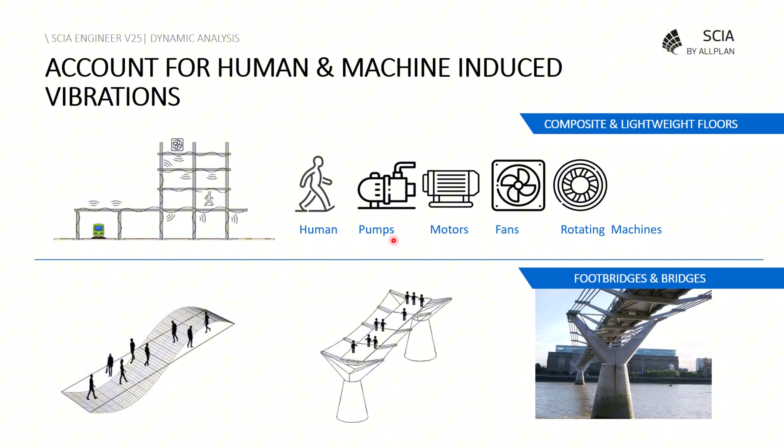As you know, buildings or civil structures like bridges, and in general every kind of structure, can be affected by vibration that can be induced by several sources. First of all, human activity in buildings or passage of pedestrians on bridges, but also machines like pumps, motors, fans, and rotating machines. This vibration can have an effect of discomfort in buildings, but can also have a structural impact when they pass a defined threshold. These phenomena are particularly important in buildings with composite and lightweight floors, and are particularly relevant for footbridges also.

In order to account for these phenomena, to study them and prevent their bad effects, we introduced in SCIA Engineer version 25 new harmonic analysis capabilities. The new analysis allows the user to perform single frequency and frequency range harmonic loading analysis. It means that the user can perform the analysis for a given frequency, but also specify a frequency range by minimum, maximum frequency and frequency step. So the analysis will be performed at once with one click for all these frequencies, and the result will be encompassed in an automatic class that will be generated.

Also, there is the possibility to consider in-phase and out-of-phase loads in order to account for the most complex harmonic phenomena. There is the possibility to apply harmonic loads in the form of nodal loads, line loads, and surface loads. And there is the possibility to use constant and Rayleigh damping.

Also, there is this new feature that allows automatically applying the sign of the harmonic loads based on a modal displacement, so based on the eigenshape. This feature can be particularly interesting for situations in which the user wants to place himself in the worst case scenario, that is, the one in which the harmonic load is orientated following the eigenshape that is closely spaced with respect to the resonance frequency of the structure. This kind of situation is specified in many guidelines for design of footbridges or buildings.

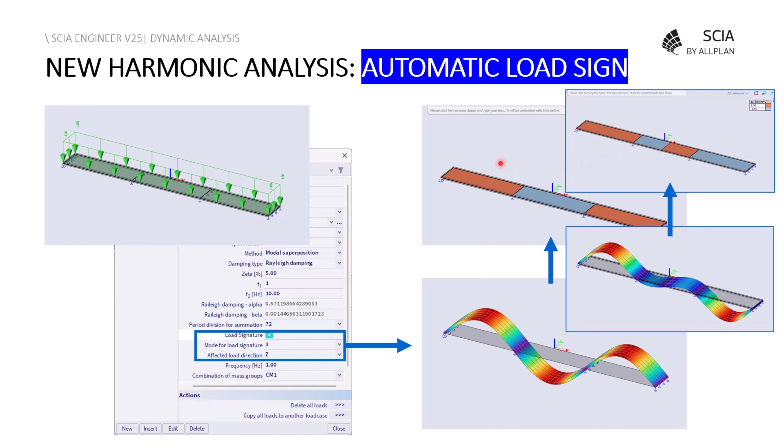Again, if I had used another eigenmode like this one, the application of the load would have followed the direction of the eigenshape. So the worst case scenario is automatically taken into account with just a click, without the need for the user to specify different zones of loads with positive and negative sign.

Many of you probably know that harmonic analysis was a feature already present in the old 32-bit versions of SCIA Engineer, but you probably noticed that the new solution offers many more possibilities with respect to the old one, so it's really a big step forward in the dynamic analysis for SCIA Engineer.

Next to harmonic analysis, another feature concerning the analysis introduced in version 25 is the possibility to perform stability analysis on stages. This is an extension of construction stages analysis that allows the user to select one or more construction stages and specify that in these selected stages the user wants to compute stability, so to perform a buckling analysis. Why? Because there can be the need during a construction sequence to show that the structure is stable not only in the final stage when it's finished, but during the whole construction process. This new feature allows exactly that, in a very simple way, just selecting a checkbox, everything will be automatically computed.

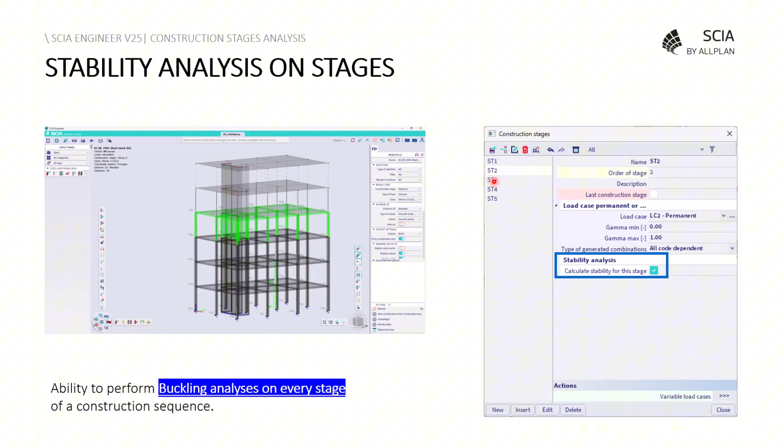Finally, what concerns the developments for the analysis part, a new convergency graph for nonlinear analysis has been introduced in SCIA Engineer version 25. As you know, we had this convergency graph in past versions of SCIA Engineer. We introduced a new one that not only gives the information for every selected nonlinear analysis, but also has many more features.

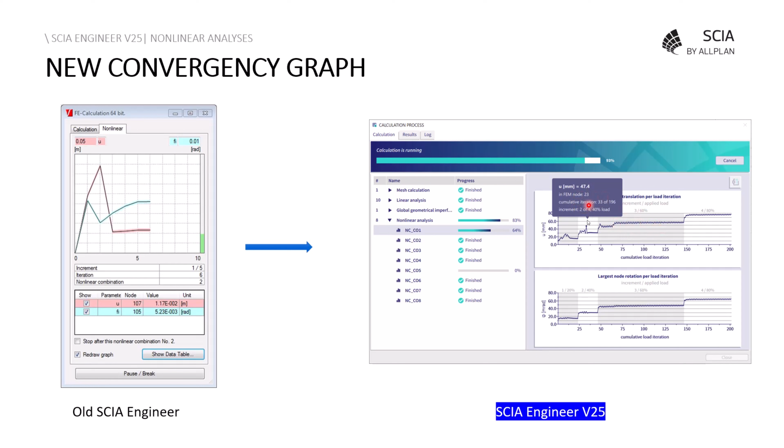But there are also other interesting features, like the possibility to export this graph in Excel, or the possibility to select each one of the points of this graph and have the local information. So with this feature we complete the part relative to the analysis, and let's move now to see the new features and improvements introduced in the field of results.

The first of these new features is the introduction of the new dynamic detailed results menu. This new results menu serves primarily to extract values relative to accelerations, velocities, and displacements of the structures. It's a feature that can be used for all kinds of dynamic analysis in SCIA Engineer, so either seismic response spectrum analysis or harmonic analysis.

There is the possibility to visualize this information on the screen, to export it in PDF, or also to have it in Excel format. But there are also other possibilities offered by this feature. First of all, the possibility to select which kind of results one wants to extract, whether peak results, so the maximum value, or root mean squared results. As you know, the root mean squared results can be very useful to judge about comfort of slabs, for instance, as the values in which the thresholds are expressed in most of the guidelines.

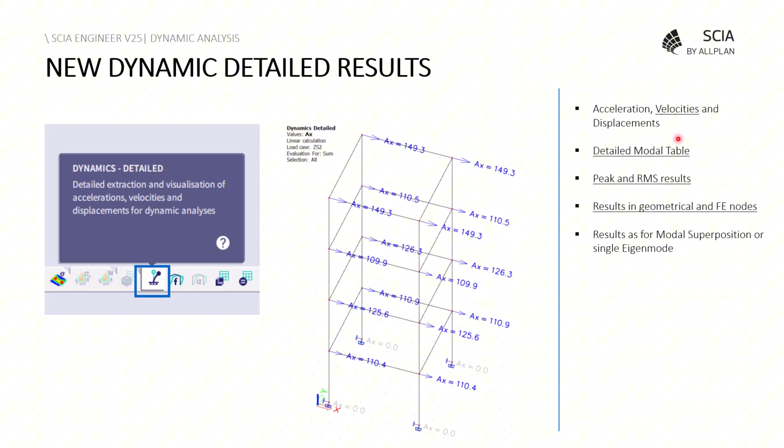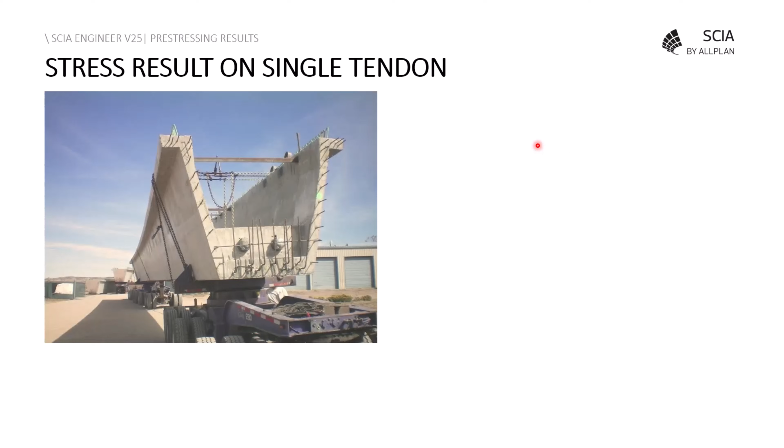Next to this, there is the introduction in SCIA Engineer version 25 of the possibility to visualize stress results on single tendons. As you know, it can be very useful for people doing pre-stressing analysis to be able to check for each single tendon the state of stress. In SCIA Engineer version 25 we introduced this possibility that was missing before.

And finally, in what concerns the results, there is this nice improvement introduced in the engineering report, that is the possibility to edit multiple live pictures at once.

In the specific, now it is possible, differently from before, to change the viewpoint of multiple pictures at once. So the user just needs to select in the engineering report all the pictures for which you want to change the viewpoint, and with a single action the viewpoint will be changed for all the pictures.

Similarly, there is also the possibility to change the view parameters for multiple pictures, by selecting multiple pictures at once and changing the view parameter. This is also a very powerful feature.

So for what concerns results, I stop here. Let's move to the new features relative to loading. In what concerns loading, in SCIA Engineer version 25 there are several novelties regarding the 3D wind load engine. First of all, there is the possibility to apply the wind load on canopies through the force coefficient approach.

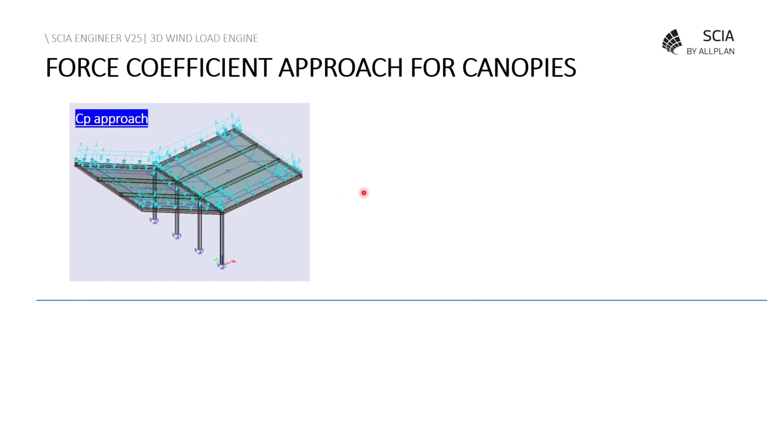As you know, till now it was possible to apply wind force on canopy roofs only through the pressure coefficient approach. But the Eurocode is clear that wind force on canopies can be applied through the coefficient of pressure approach when the purpose is to design the roof element itself, while when the purpose is to design the structure, the whole structure, the overall force coefficient approach should be used. In SCIA Engineer version 25 we introduced this possibility, so the user has just to select in the setup of the wind load which kind of approach to use, and the software automatically determines the equivalent line load or the pressure loads accordingly.

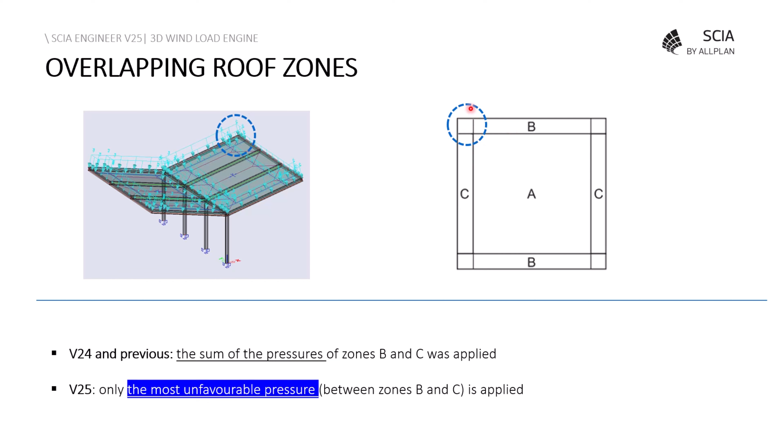Next to this, there has been a change in the algorithm regarding the overlapping zones on the roof. For instance, looking at this picture, the Eurocode is not really clear, because on the corner it's not clear which pressure should be applied, the pressure of zone B or the pressure of zone C. Till now we were just adding these forces, so in this corner zone there was an overpressure leading to anti-economical design. Starting in SCIA version 25, only the most unfavorable pressure between these two is selected, as is recommended by many national guidelines.

Finally, in what concerns the 3D wind load engine, we introduced the possibility to take into account the friction forces induced by the wind. The Eurocode specifies a criteria to judge when the friction force should be used. This criteria looks at the ratio between the surface of the structure parallel to the direction of the wind over the surface of the structure orthogonal to the direction of the wind. This criteria can be quickly satisfied when dealing with elongated structures typical of industrial halls.

For this, we introduced a simple switch that is present in all the wind data. When the user selects this friction force switch, he only has to specify the roughness of the surface, which can be the roof surface or the wall surfaces, and automatically the software will take into account this component and generate the friction force over the envelope of the structure.

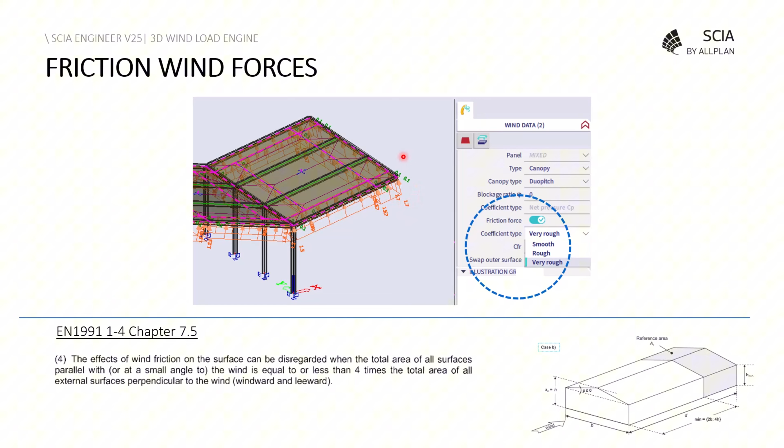Finally, in what concerns loading, the last development introduced in SCIA Engineer version 25 regards how the temperature load is managed in combinations for bridges. To properly account for temperature loads in bridge combinations, a distinction has been added between uniform and gradient temperature loads, and these two different temperature loads are now combined together according to the relative chapter of the Eurocode. So there is no longer a need for the user to manually assemble combinations for this phenomenon of temperature load, everything is now managed automatically.

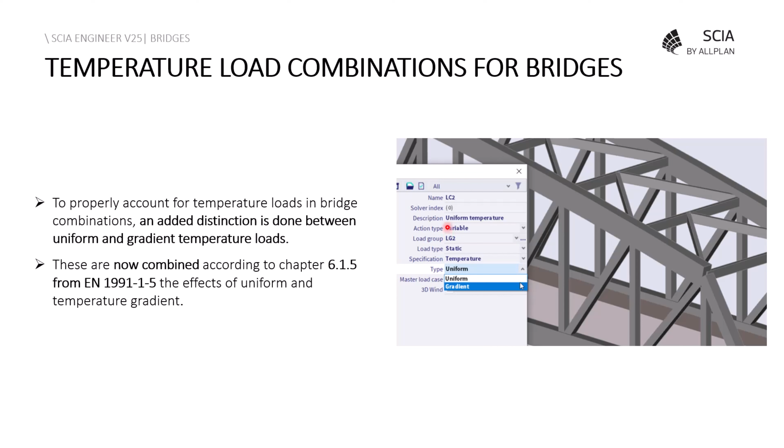Now let's move to the final part of this presentation, related to the novelties introduced regarding design in SCIA Engineer version 25. First of all, on top of construction stages analysis, it has been introduced the possibility to perform design checks on stages results. What does this mean? It means that for each stage, or for all stages at once, the user can perform design of concrete, steel, or timber. This was not possible before and can be very useful for people using construction stages analysis.

Then, next to this, SCIA Engineer version 25 introduces AISC 360-22, the latest design code for steel in the US. This feature can be very useful not only for people designing structures in the US, but also for many users based in Europe who design structures worldwide, because the AISC code is used not only in the US but in many parts of the world.

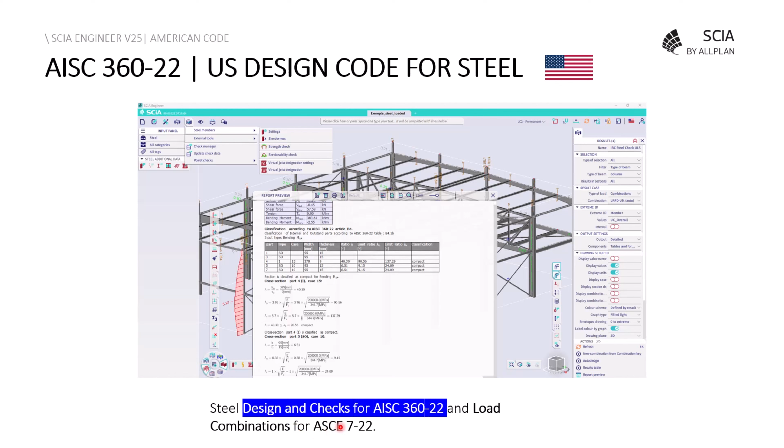Starting with SCIA Engineer version 25, there is steel design and check according to American norms, and the load combination rules relative to ASCE 7-22 have been introduced for the American code. There have also been several improvements concerning the update of American profiles and Brazilian profiles in the cross-section library, and a new L-type section has been introduced.

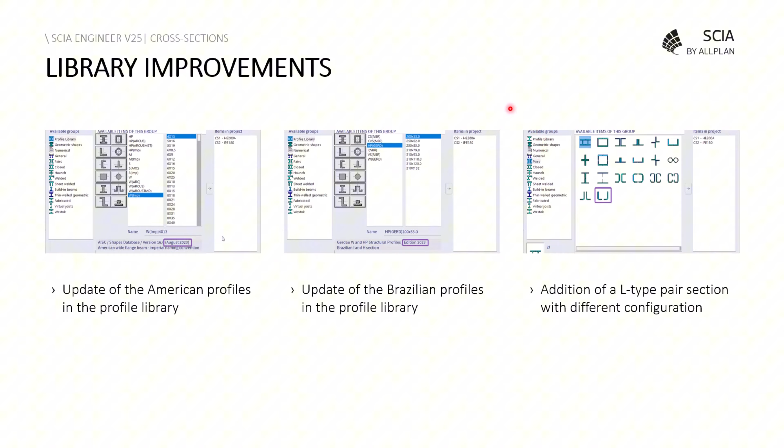Finally, for the design part, SCIA Engineer version 25 now has a new link with FRILO modules, specifically the B5 Plus module, which regards the design and check of columns. This module is very powerful and important because it allows, among other things, fire design and check of reinforced concrete columns, a possibility currently missing in SCIA Engineer itself.

With this feature, I end this presentation of the novelties of SCIA Engineer version 25. I hope you enjoyed it and found a feature you were looking for. In the next presentation, my colleague will show you more details on some of this. Thanks for your attention, and enjoy the rest of the presentations.

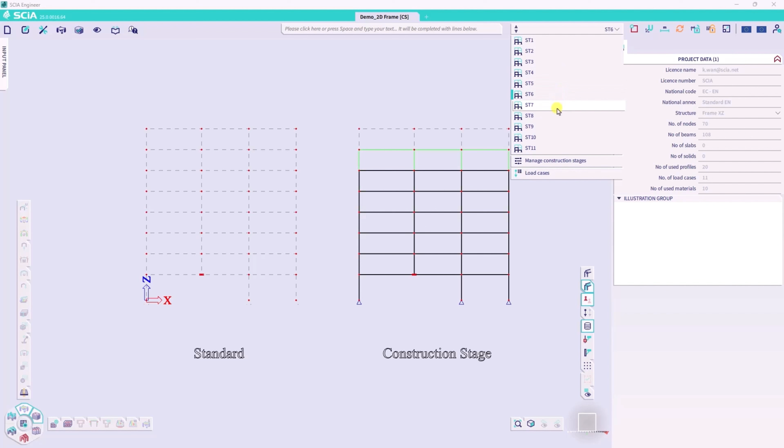In this example, we also utilized material modifications to enable the creation and analysis of the structure with a different timeline and varying concrete properties. In particular, level 1 is cast first, and 7 days later level 2 is cast, and so on. This means that when level 2 is cast, the characteristics of level 1 are not yet the same as when the concrete is 28 days or older. By creating these material modification groups, the changes in the E-modulus are taken into account.

Here we can review the different modification groups for each stage. As you can see, once level 1 reaches 28 days, 100% of the E-modulus will be achieved. However, at each stage, there are still other levels that haven't reached 28 days yet, and their E-modulus is adjusted accordingly.

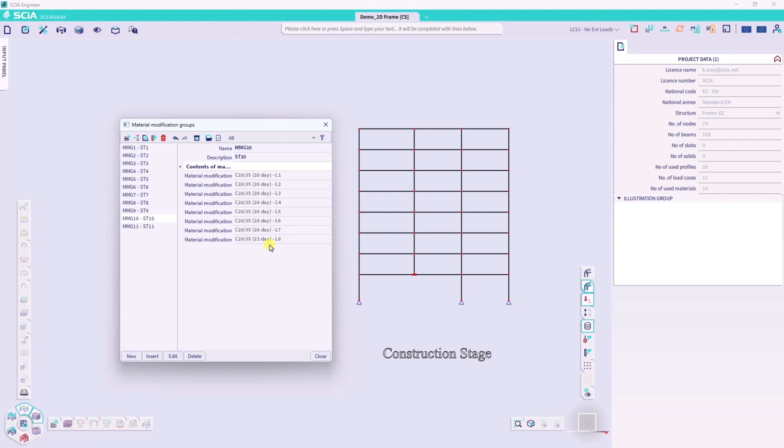The correction that is taken into account can be found in the material modifications. The E-modulus reaches 60% after 7 days, 90% after 14 days, 95% after 21 days, and 100% after 28 days.

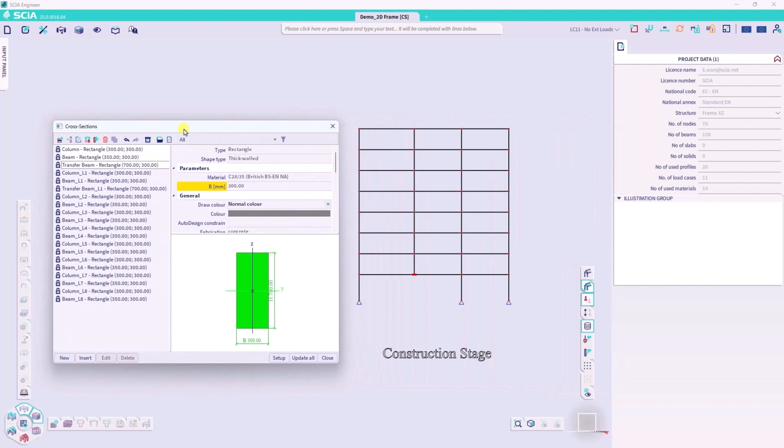For each level found in this model, we created a different type of material to apply this correct information to each level. When we take a look into the cross-section library, you will find different cross-sections for beams, columns, and transfer beams. Apart from these three types used in our standard model, for the construction stages, multiple cross-sections are created.

These cross-sections will have exactly the same size and parameters, but for each level, these are duplicated. By doing so, the different materials for each construction stage can be applied accordingly.

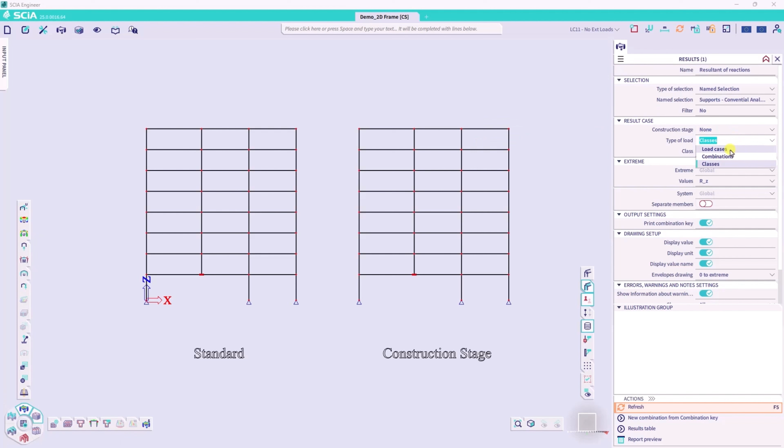Now we run the analysis to take a look into the results of both models. We start with the resultant of reactions to take a look into the self-weight of the structure. A named selection is used to take a look into the results for each model separately. For the left structure, construction stages is set to none and the load-case self-weight is selected.

Now that we know this result, we can compare this with the construction stages model. The named selection is switched, the property construction stages is set to all stages, and we see now that for the construction stage analysis, we find exactly the same result for the reaction forces.

Now that we know the self-weight is the same, we can check the different internal forces. We use a named selection to take a look into the result of a transfer beam in both models. We change the construction stage to all stages, and this result will immediately show you that the internal forces in the transfer beam are different between both models. In the model with construction stages, we notice higher internal forces.

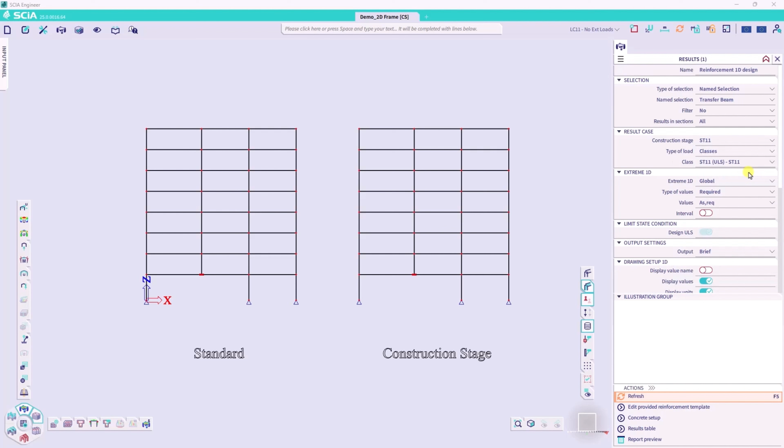Now we can take this a step further and take a look into the new development, the reinforcement design of this transfer beam. For these results, we will use exactly the same named selection, and we change the construction stages to the last one. For the extreme 1D property, we change the value to member, so we are comparing the most extreme numerical values of both members. As we now expect, in the construction stage model, more reinforcement is required.

The classic workflow of concrete you are used to is available here, which means we can take a look into the required longitudinal reinforcement as well as into the required shear reinforcement. Apart from that, you can also take a look into the provided reinforcement that will follow the template defined for the members. In these results, you find a different reinforcement scheme as well for the model with the construction stages. Additional reinforcement is added where necessary.

When comparing this to the standard model, you will see that for the standard linear analysis, no additional reinforcement was required.

For this provided reinforcement, we can of course also take a look into the different values. For example, you find the weight of your longitudinal and shear reinforcement as well as your shear reinforcement configuration here.

For these results, we see something similar. When taking a look into the output options, you will find that the detailed output, which you are used to, is also available for the construction stage analysis. This report will give you an overview of the full concrete beam check.

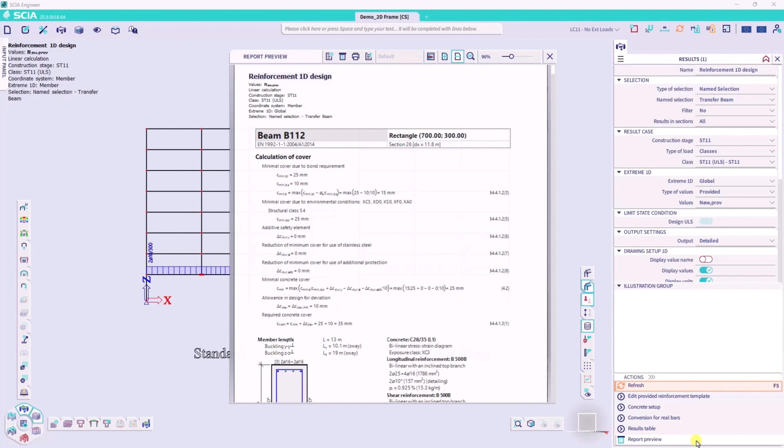It will be performed for both the beam in the linear analysis as well as for our construction stage model. You can find here all the necessary information you need to take a look into the required reinforcement as well as into your reinforcement template.

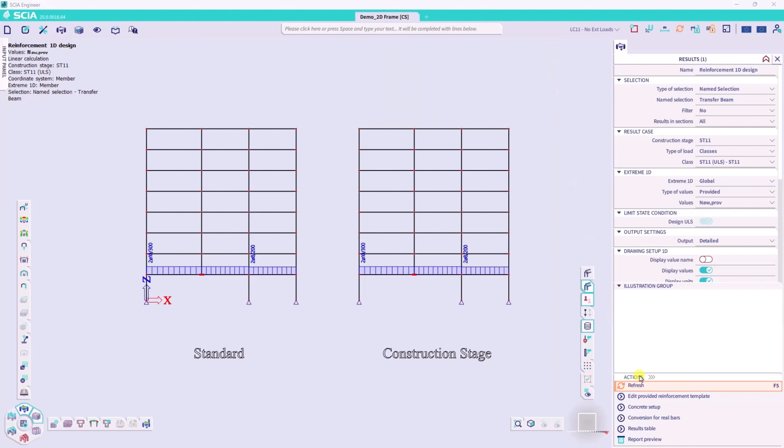After reviewing this, you can choose to convert your reinforcement to real bars, and we can take a more detailed look into our transfer beam of the construction stage model.

We will start by taking a look into the ULS check for this transfer beam. As we did before, to check this result, we change the type of selection and we make sure that the construction stages are taken into account in this result.

Once these are loaded, we can check if our design is sufficient based on all these ULS checks which are activated. In this case, this seems to be fine, so we can take a further look into both the ULS and SLS checks. So we make sure these are activated here on the right if you want to perform them. We will include the crack width check.

Once these are loaded again, we can check the results. And in this case, we do notice that for the crack width check, in some locations, the check is not sufficient. If you want, you can take a further look in the standard output, where you get an overview of the different values that are found.

If you want to know something more, we can take a look into the individual crack width check. This works exactly the same. We make sure the selection is set correctly and that all stages are used. And in this result, we find exactly the same value.

Now, instead of a standard output, we can take a look into a detailed output again, and you can find the full overview of the crack width check.

With this information, you can evaluate your reinforcement and make the changes necessary to fulfill this check. You can change the reinforcement by selecting it and clicking on Edit Reinforcement. There we can select each reinforcement bar and change the amount of bars as well as the diameter of the bar. Right now we are changing the additional reinforcement which was added on the bottom in the middle of our beam and on the top at the end of our beam.

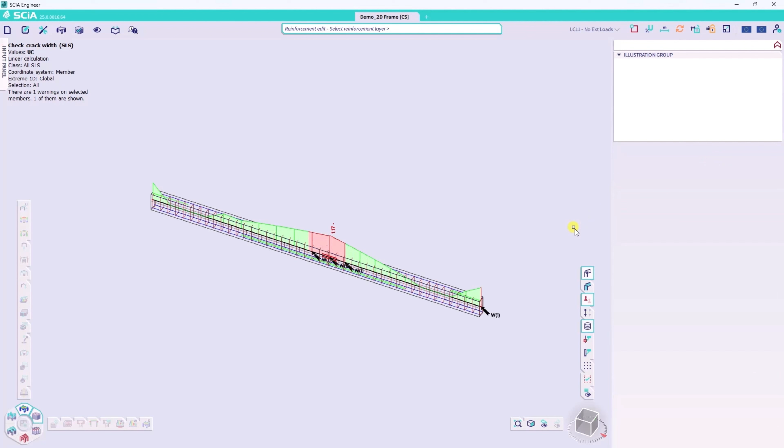After these changes are made, we can perform exactly the same check and review the results again. We will take a look into the crack width check again, and in this case we will see our modifications are taken into account and that for now the unity check is sufficient.

Something to remark here as well is that you can take a look into the result of construction stage 1, and in the detailed output you should find that the E modulus is modified based on that first stage because our material was only 7 days old.

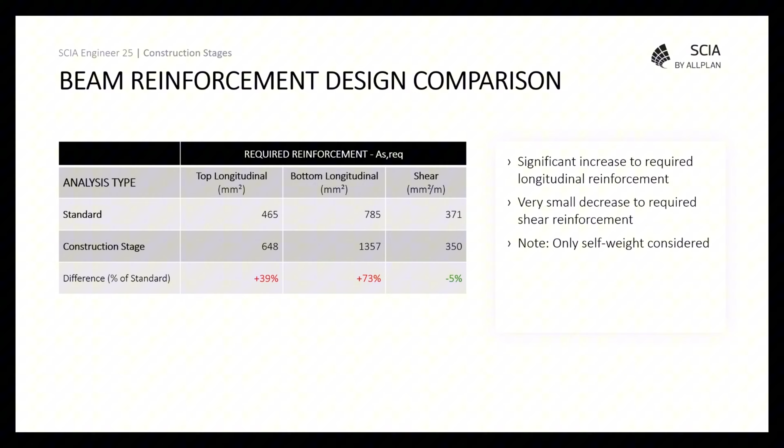Here you find another overview of the difference in the required reinforcement between a standard calculation and the construction stage analysis. Now that we have taken a look into this for a 2D model, we can do exactly the same for a 3D model.

The basics here are the same. On the left, a standard linear analysis without construction stages. On the right, you find the model with construction stages. In this case, again, different stages are created for each different floor.

Keep in mind that this is just an example of how you can use the construction stages. It is also possible to create different stages for columns and walls separately, and so on. Apart from these stages, we also apply the material modifications again to make sure that the age of the concrete is taken into account in each construction stage.

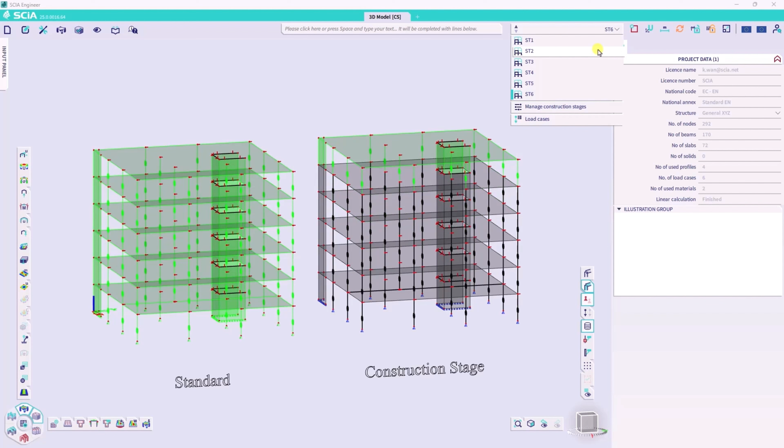Since this model is already calculated, we can start by taking a look into the results. We will first take a look into the 2D internal forces of one of our slabs, and then compare the standard results with the construction stage results.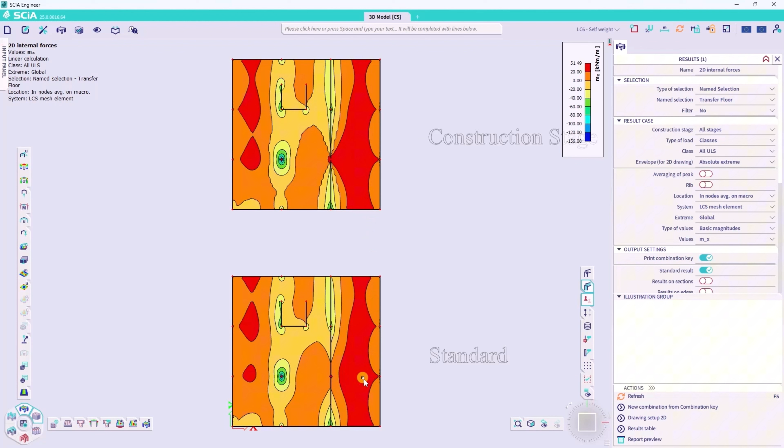Once those are visible on screen, you will see that there is a different distribution and that it's mostly concentrated along the transfer beam that we find in this model. Other differences in the internal forces are less prominent.

Similar to what we have done before, we can take a look into the reinforcement design as well. As we did for our 2D model, we can take a look into the reinforcement design of our 1D member, the transfer beam here again, and we see that the required reinforcement was more in the construction stage model.

We can do the same for our 2D reinforcements. There we can as well take a look into our reinforcement design, and we start by taking a look into the required reinforcement. We choose direction 2+ right now, so it's the top side of our plate, and we see that there are some different results, mostly concentrated around the transfer beam.

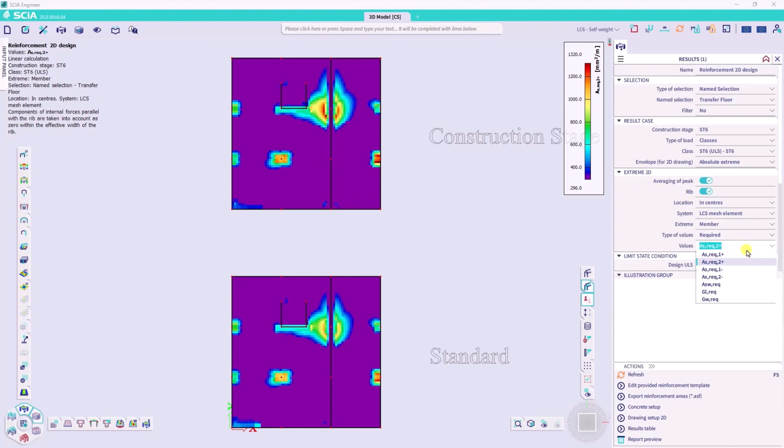Other results will be quite similar. We can check the same for a different direction, for example, on the bottom side, and there we will see the same different results, mostly around that transfer beam.

The difference you find in these results are mostly caused by the different E modulus that is used in the different stages, since a lower stiffness is used during the analysis. With the result table, you can then further take a more detailed look into the different results in all the different directions that you find here.

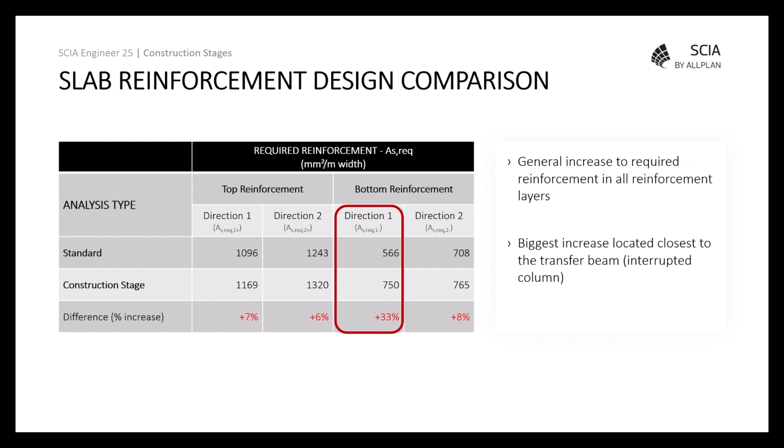Here you find another overview of the difference between the required reinforcement for the standard analysis and the construction stage analysis. Instead of checking the required reinforcement, we can then again take a look into the provided reinforcement.

Here we start by taking a look into the unity check for this provided reinforcement. We see here that no red is found, so all unity checks are below 1.

We can now also take a look into the configuration, which will show us what the diameter is chosen in the reinforcement template and the spacing in between. For direction 1-, I find diameter 16 with a spacing of 150 millimeters, and it seems to be the same in the other directions as well.

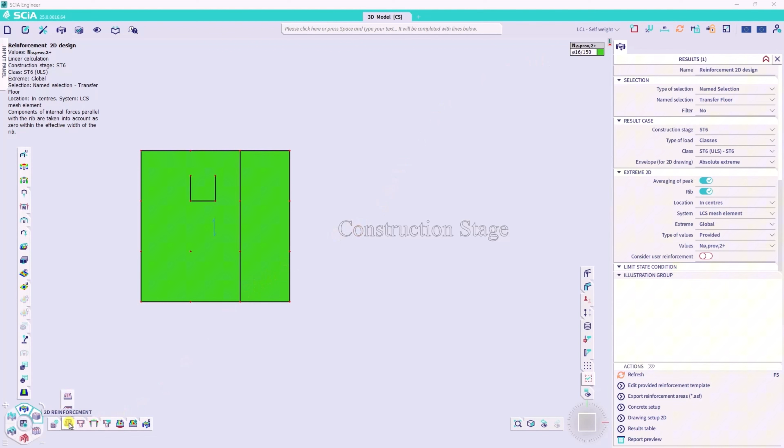Not only is this provided reinforcement template supported for 2D members with construction stages, but user reinforcement can also be taken into account. Let us add some lower and upper reinforcement to the full area of this slab with the command 2D reinforcement. You will have the possibility to take this user reinforcement further into account for the different checks.

Let's overview the properties used. For this 2D reinforcement on the top and the bottom, both diameter 16 is added with a bar distance of 150 millimeters in all directions, so in general the same as our provided reinforcement template.

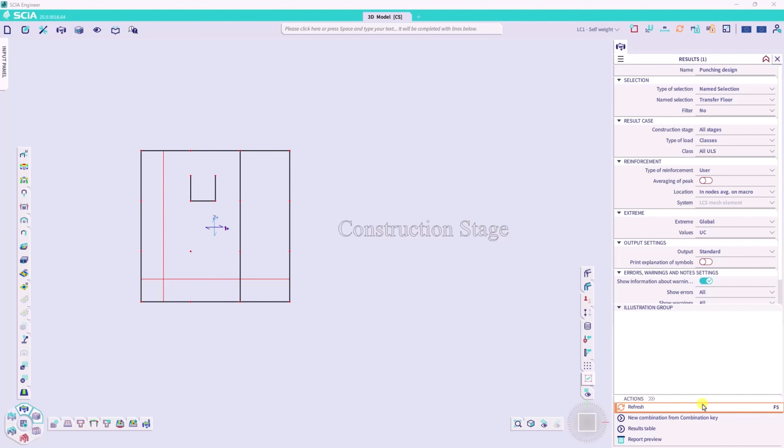We start by taking a look into the punching design. Keep in mind that for 2D concrete checks, you need to select the type of reinforcement to be taken into account during this check. Now we will use the defined user reinforcement, but you have the possibility to choose the required or the provided reinforcement as well. In this case, we see a green value, which means the check is satisfied and no punching shear reinforcement is necessary.

Next, we can also take a look into the crack width check. Here again, you need to modify the type of reinforcement to take into account, with all the same options as discussed before available. With these results, you can immediately see where the concrete will be cracked and if the crack width is too large whenever a unity check higher than 1 is found. You can also look into the exact crack width size by changing the value you are looking into. In this case, for all locations, a crack width below 0.3 millimeters is found. The detailed report will again give you a full overview of the check and can help you change the reinforcement design accordingly.

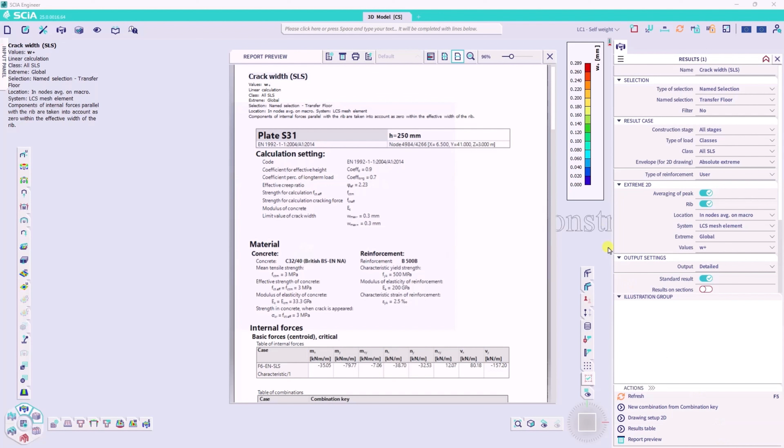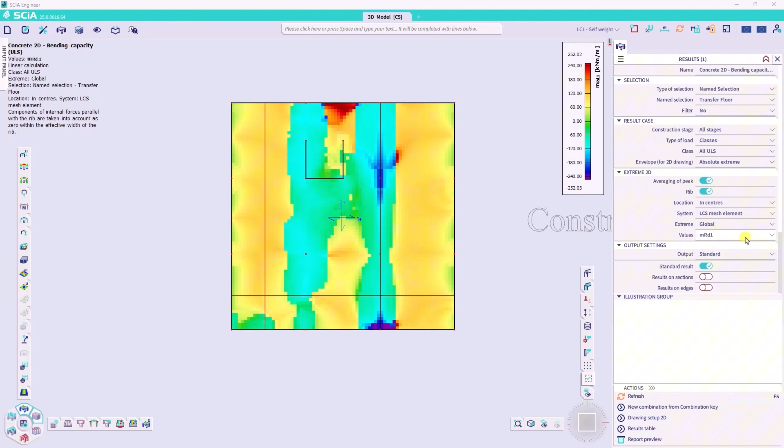Lastly, the concrete bending check can also be combined with the construction stages analysis. The only difference for this check is that only user reinforcement will be taken into account; the provided reinforcement template will not. This is the same for the standard linear calculation, so there is no difference there. This check takes the exact position of reinforcement into account and thus gives you the opportunity to check a member with one or multiple reinforcement layers. Apart from these visualized results, you can of course look again into the output of this check to find all the necessary information you need to modify anything.

In the next topic, we will discuss the improvements done to the automatic generation of 3D wind loads. In general, we now cover two new aspects: one is the method of overall force, which can be set into the national annex, and the other is friction loads on roofs. To take a look into both topics, we will go to an example with a canopy for which the load is now generated without those two improvements.

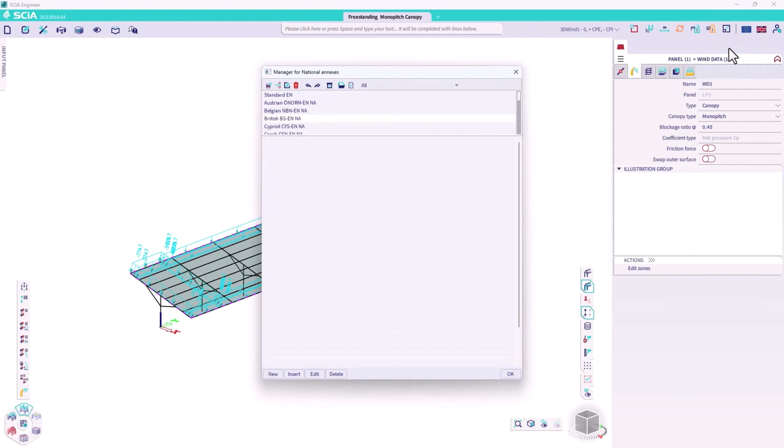First, we will take a look into the method of the overall force, which you can modify in the national annex. We can find it in the top, where you can open the annexes, and in topic 1.4 you can open your wind data. There we can change the coefficient type to the overall force. Now, once we regenerate the wind loads, this is taken into account and we should see the loads are modified. Let's take a look through our different load cases, and you see right now that you get an overall force instead.

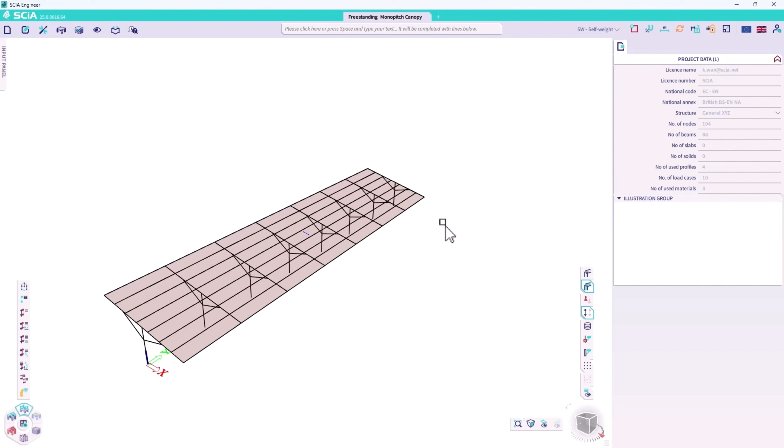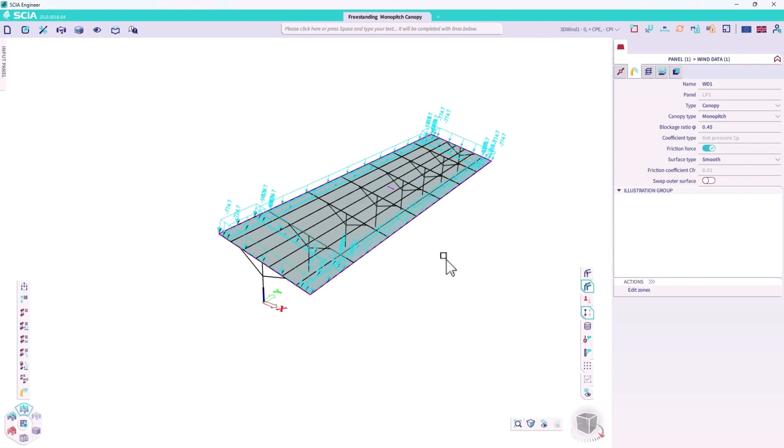The second improvement here are friction loads. These friction loads will be applied in the Y direction. Let's first take a look into our 3D wind, which is generated without these friction loads. Here you will find the different surface loads as you would expect. To change anything to this friction load, you go to the properties of your load panel and click further onto the wind data, where you can activate the friction force. You can also choose the surface type, which is now set to smooth. Once you run the 3D wind generator again, you can take a further look into those forces and you find that for this wind load case, a friction load is added. If we now change the surface type to very rough, we should notice that its value of friction load gets much higher.

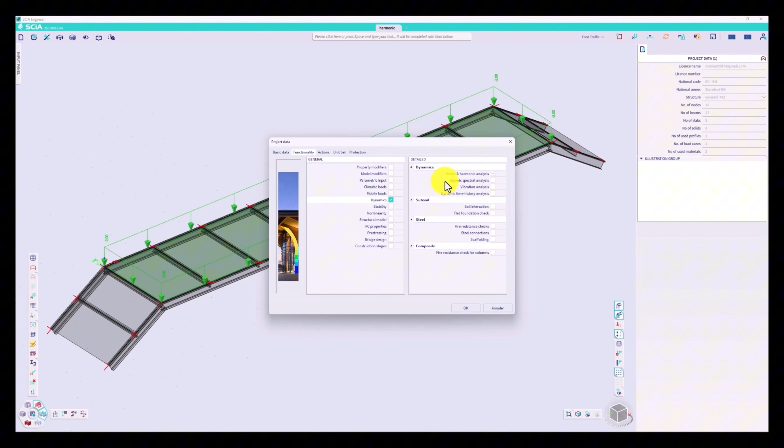The third topic of today will be the dynamic analysis, and we first take a look into the harmonic analysis. To make sure you can perform the harmonic analysis, we first need to check the active functionalities. We need to make sure that dynamics is toggled on, and on the right we need modal and harmonic analysis, which is by default activated once dynamics is selected. In this example, you will find two load cases: one is the self-weight and the other is the foot traffic.

Now, to start off, we will first perform the modal analysis. To do so, we first need to create some mass groups. Here, one is created for the self-weight and one is created which is linked to the foot traffic load case. Then secondly, we need to create a combination of mass groups as well. In here, the same masses as we just created are found. Now that we have those created, we can immediately perform the modal analysis.

We will be able to take a look into those different modes that are calculated by using the 3D deformations. Instead of taking a look into the 3D deformations of a general load case, we will have the possibility instead to change the type of load to mass combination. In this mass combination, you can find the different modes that were calculated. We will take a look into the first, the second, and eventually the third as well. Of course, you can take a look into the other modes that were calculated.

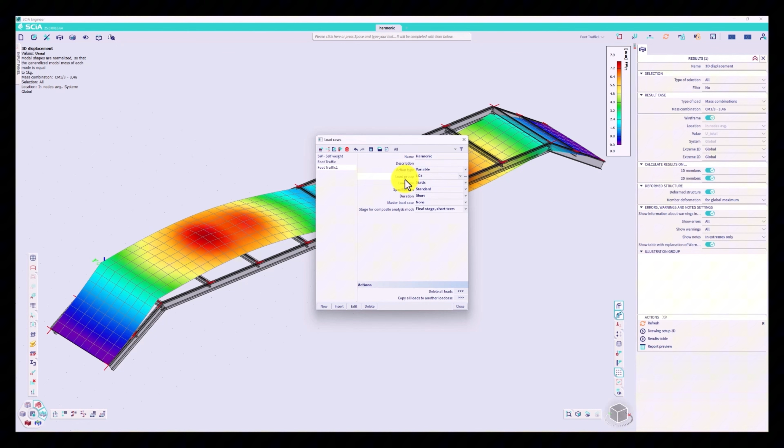Now, let's say we would like to perform a harmonic analysis on this model. In that case, we need to create a different load case. We create a new load case, call it harmonic, and then we can change the load type from static to dynamic. Once this is changed, you can choose the specification, and here we have the possibility to choose harmonic, and then secondly, we can choose the method that will be used. We will use the modal superposition for now.

Then right below that, you can choose the damping type. You have both Rayleigh damping and constant damping. What is the difference? If you select Rayleigh damping, then you will need to fill out some properties like the frequency and so on, and the damping itself will be calculated. Other than that, if you choose constant damping, then you fill out the value for that option. Let's use constant damping for now and take a look into the different properties here.

Next up, you find the period division for summation, where you can choose different values. The default value will be 72. Eventually, we can also give a load signature.

Now, imagine that the frequency used here would be 4 Hz. In that case, we will notice that our first mode, which was around 2 Hz, will not be influenced that much. Our third mode is closer to this frequency, so it could be that there we find more influence since our structure will resonate. To take this into account, we can add this load signature. Now to show you this, we will copy this existing load case and make sure we add this load signature.

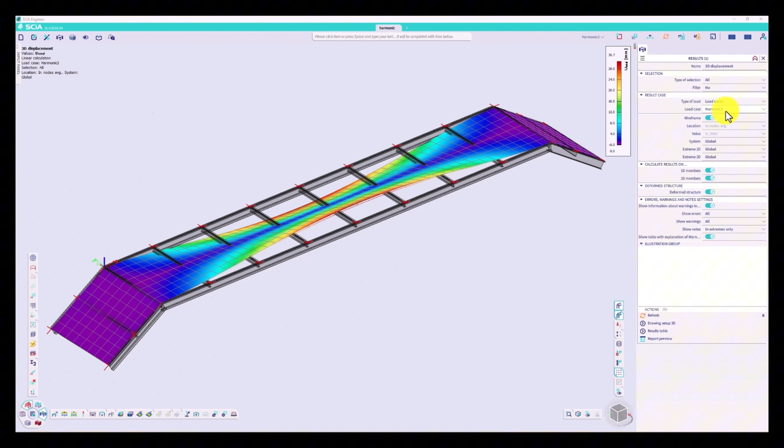Now for this load case, no load signature was assigned. For harmonic 1, we did assign a load signature, and there we find a displacement of 31 millimeters. Lastly, for harmonic 2, we assigned a load signature as well, and there we find a displacement of 40.7 millimeters.

If we now go back to our load cases, we can now say that this load signature gives you the possibility of creating a combination following the mode that is indicated. This means that we can recreate the same result by defining this load case differently.

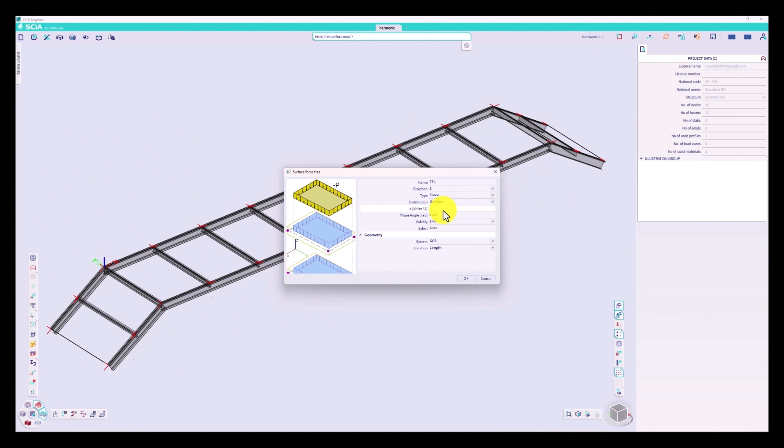First of all, we create a copy of this load case and we will toggle off the load signature. To make sure that we then find the exact same result as what we have seen here right now, we will make sure that we change the loads that are created, especially the direction in which the loads are working. So harmonic 3 is exactly the same as harmonic 2, but we will change the loads specifically by creating 3 loads in the direction of the mode that we found before.

First we create our 3 loads, and I will change the sign of the first 3 loads to make sure it works the other way around. We run the analysis again, and now we should see that the results will be exactly the same for this third harmonic load case. For our second, we find 40.7, and for our third, we find exactly the same results. This load signature makes sure that you apply the right direction based off those modes.

We can also take a look into what would be a dangerous result. For example, we change the frequency from 4 to 3.5, which is pretty close to the mode that we found. If we then take a look into our result, we expect our deformation to be much larger because the structure will be resonating. Let's take a look there. If we now take a look into the same deformation of our harmonic 2 load case, we find a deformation of 165 millimeters, which is for now the most dangerous situation.

Next up, we can take a look into a new feature, which is the vibration analysis. That is also a functionality you need to toggle on before you can use it.

To start off, we go back to our load cases and we will change a property here. Right now we use the specification harmonic and we will change it now from harmonic to harmonic range. By doing so, you will now have the possibility to define a specific range with a minimum and a maximum value. The third value you define is the step in between, which is used to go through this range, so we will use 0.1 for now. The rest of the steps are exactly the same. I perform the analysis and you will now see that for my harmonic load cases, all the different frequencies are calculated.

Now, before we take a look into the results, we are going to make a result class to make sure that we have different classes for our different harmonic load cases. So I have one for my first load case, then the second one, and then lastly for harmonic 2 as well. Now we can take a look into the deformations, but instead of taking a look into each load case separately, we will go to these classes to take a look into these results. And now we get a full overview of the most extreme results of this frequency range.

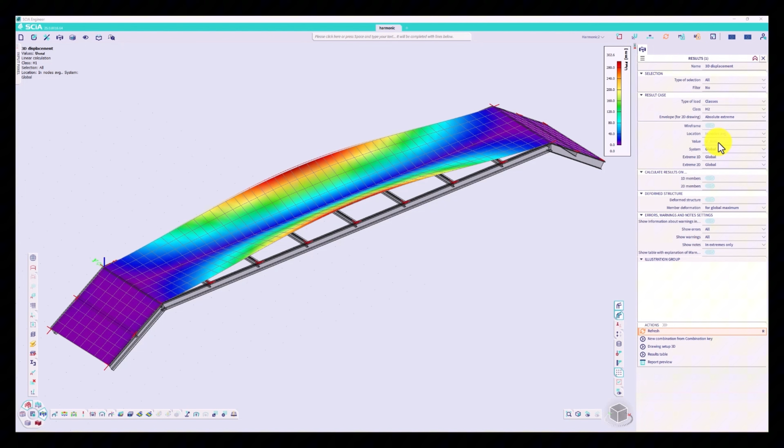And for this H2, we find now the same range or the same displacement that we found before, which is around 166 millimeters.

Other than these displacements, we can also take a look into detailed dynamics results. Here you first select the right result case, which can be a load case or a mass combination, and below that you find the values to choose from. In this case, we will take a look into one of our harmonic load cases, so we change the type of load to load case. For these type of load cases, you will find different type of values: displacement, velocity, and acceleration. Let's take a look in one of our harmonic load cases, let's choose harmonic 1.1 - 3.10, and we first start with the displacements.

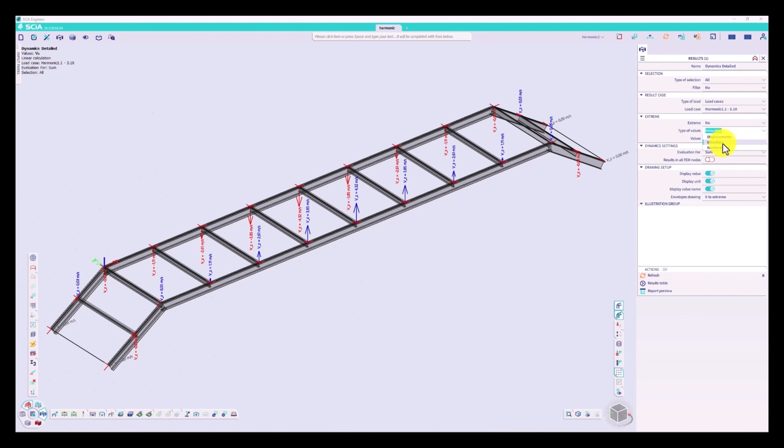Now we are taking a look into the X direction. Let's change this to the Z direction. Then you find the displacements of these nodes. Next up, we can take a look into the velocities or the accelerations. Here you can find a comparison between the linear analysis, the harmonic analysis, and the harmonic range analysis. It's really important to highlight that when you modify the structure, the harmonic range allows you to cover the possibility of resonance for your structure, since any modification of the structure can influence the found period.

The last topic that we will discuss today is the new development related to the interoperability with FRILO tools. We are talking about the B5 Plus module. To find a FRILO module, you can use the SCIA spotlight on top to search for it, and in this case, we were searching for the FRILO reinforced column tool.

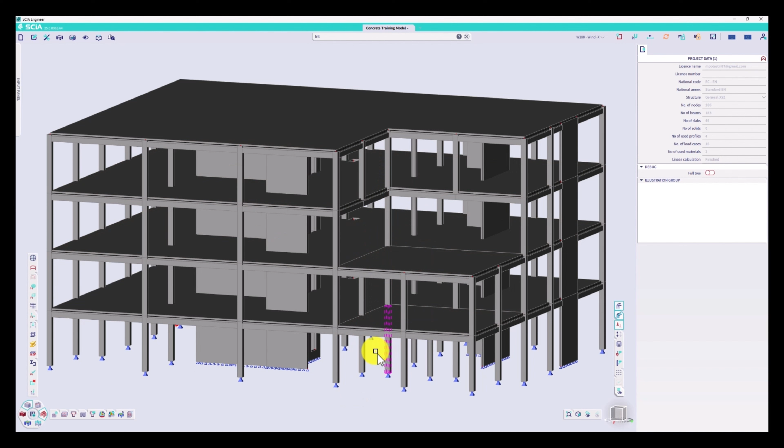If you want to add it to one of your menus on the bottom, you can always drag and drop the icon. To export a column to this tool, we can select it and we can use the tool to export it to the B5 Plus tool of FRILO. In here, you can either design the reinforcement of your column or perform a fire check.

Now let's first take a small look into this project here. We should be able to find the boundary condition as the support here, and we will also find the different imported loads from SCIA Engineer if we go to loading. There we can now find the permanent loads and so on, which were imported from SCIA Engineer.

Now we can perform the design. We can check the calculation mode, which will either be design or check, and we can activate the fire design based on STEM or on the code.

Now we choose a class of fire resistance. Let's choose R60. We can choose the calculation mode here.

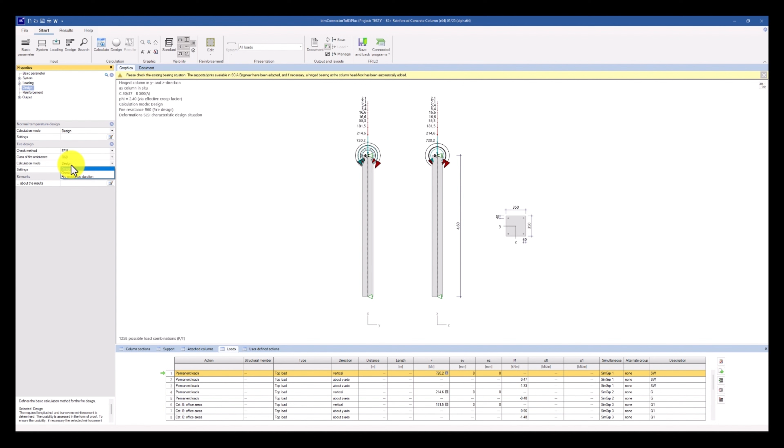And then next up, we will be able to choose some settings here. The settings you find here are all related to this check. You can find the fire resistance here again, as well as thermal addition, inclination, and so on.

If we then take a look into the reinforcement options, we can do three things here. We can manually design reinforcement, we can create reinforcement, and we can remove existing reinforcement. We will later on see how to add reinforcement manually.

On the bottom there, you will also see that there is an export to Allplan already, and there you can see that we continue to improve the interoperability between our software tools. So now from FRILO, you can already export something to Allplan.

There are also some settings you can change for your output and results that you can set before running the calculation. You can either choose to take the first order into account, second order, and so on. Once those are set, you can calculate your model and it will propose a design to us.

In this case, we see the design contains 4 bars of 16 millimeters, and you can choose to increase when necessary and run the calculation again.

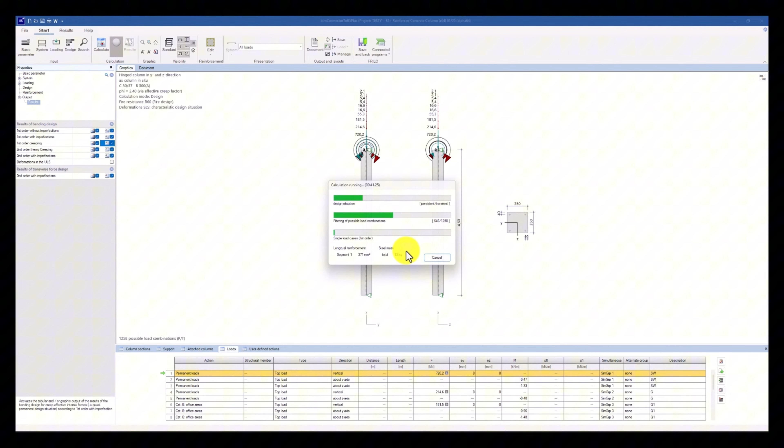Next up, we find the temperature analysis, where you can still change some properties, and once those are changed, you can run calculate. Then the full calculation is performed and the results should be found.

On the bottom right, you now already get an overview of the designed longitudinal reinforcement and if it is sufficient. And in this case, we see that for the fire design, this is not sufficient.

To take a further look, we can also take a look into the document where you can find a detailed output of these results. This is a live output, so it will immediately be modified when you make any changes. Now in here you get a detailed overview of the different internal efforts and so on, and you can find here in this case that the reinforcement is insufficient as well.

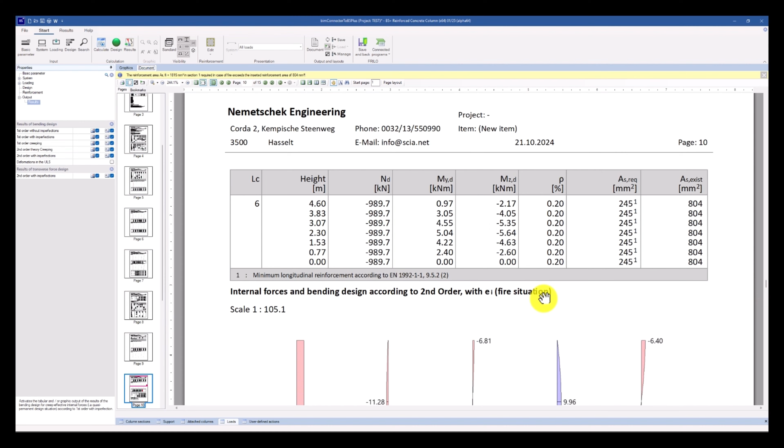Other than this document, you can also find a graphical output that you can find on top in the tab results, and there you can find the different internal efforts and so on. You can check the deformation, the reinforcement, all the options are there on top.

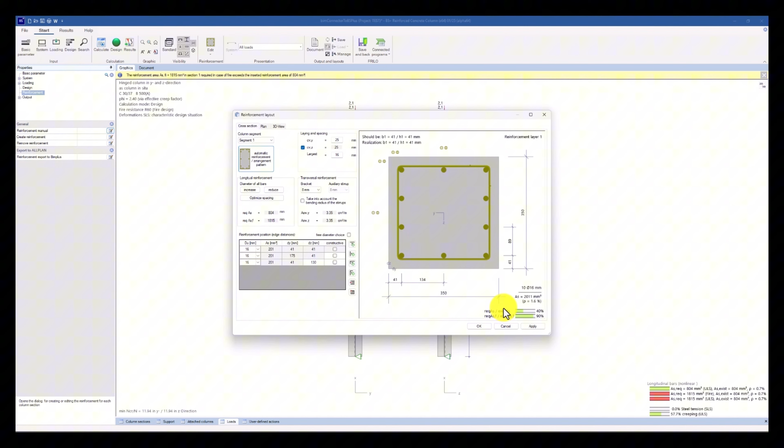Now we can also choose to manually add some reinforcement here, as stated before, to change the amount of reinforcement that is used. Let's take a look into that menu specifically, and we can choose here what arrangement we can use for the reinforcement. So let's choose a template here, which we know will cover the amount of necessary reinforcement.

Now, when this is changed, you will need to recalculate to take everything into account, and then we can see if our reinforcement is sufficient or not.

So let's run the calculation again, the same as before. Take a look in our temperature analysis. And then afterwards, we see now that our required reinforcement is fulfilled, that the reinforcement we applied is sufficient.

On this note, we can end the demonstration of the new features in SCIA Engineer version 25. I hope you find it interesting, and if you have any questions, do not hesitate to reach out. I will now give the word back to Michele.

That was an impressive demonstration, Merit. Thanks a lot for showing us the capabilities of this version SCIA Engineer 25. Now we have already some questions. Please continue to ask your question in our chat, and we will ask one of those to Bjorn.

Bjorn, can freeload be used in combination with a harmonic analysis? Yes, that can be used. In the past, it was only possible to use nodal loads, but now with the new development, it is possible to use both nodal loads, line loads, and even surface loads in a harmonic load case.

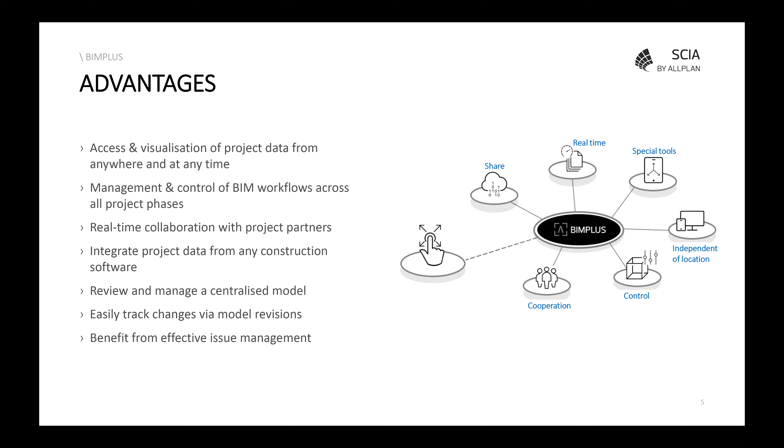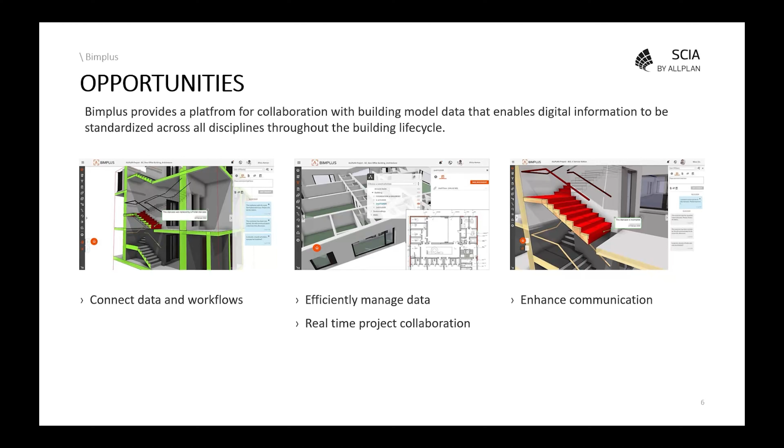Within Bimplus, we offer a very robust data environment that can be used across many disciplines to connect data, efficiently manage that data, enhance communication, and build effective workflows to aid productivity, helping us reach the goal of digital delivery for our projects, including all disciplines involved.

Further to that, we are able to bring quite advanced workflows on both the physical model representations we host within Bimplus and the analytical structural models, and bring in 2D documentation to support the derivation of a complete project model. We can represent drawing data within the 3D model environment for better understanding the status of the model against the drawings to be issued, as well as any clashes within the model that can be reported on, and an approval process which can be invoked to assign further responsibility within the team to approve any model changes. So we have complete visibility on the process for the managed model.

So let's take a little look at the Autoconverter functionality that we've developed to aid the process of engineers in taking that 3D geometry model into a structural analysis model.

Principally, Autoconverter combines the 3D modeling process with structural analysis software. So if you are using Allplan for modeling, for example, and would like to have a managed environment for developing analysis models in SCIA, for example, this is a great environment to do that. Of course, having it sit within a hosted collaborative environment manages that process - it's a controlled environment for everyone involved.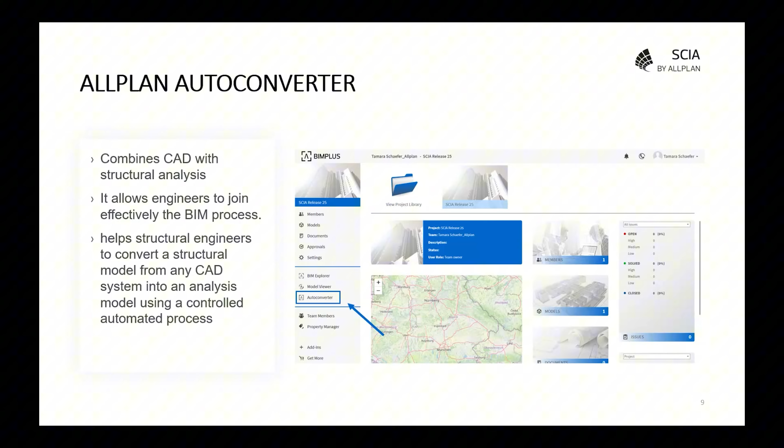One of the principal advantages of Autoconverter is that it is entirely flexible to the needs of the engineer. It's an intelligent system that can recognize multiple formats. Of course, if there is a direct link to Autoconverter, such as we have with Allplan, it's a fairly straightforward process to build an analytical model from the resulting data. But we do not limit ourselves to just this data.

It's also possible for engineers to bring in IFC files directly into that process, either to work in isolation on IFC files, or to bring IFC files in communication with models that have been directly brought in from other processes. So Autoconverter clearly guides the engineer through a series of processes to derive a structural model, intelligently mapping cross-sections, materials, etc., as you go from one end to the next.

Here at Allplan, we also developed a file format called SAF, the structural analysis file format. This provides a description of the model created in a human-readable format from within Excel.

This is incredibly important. As well as being human-readable, it also allows the engineer to make edits manually and bring those edits back into the managed workflow. SAF is well supported within a wide community of engineering structural analysis software, including both FRILO and SCIA.

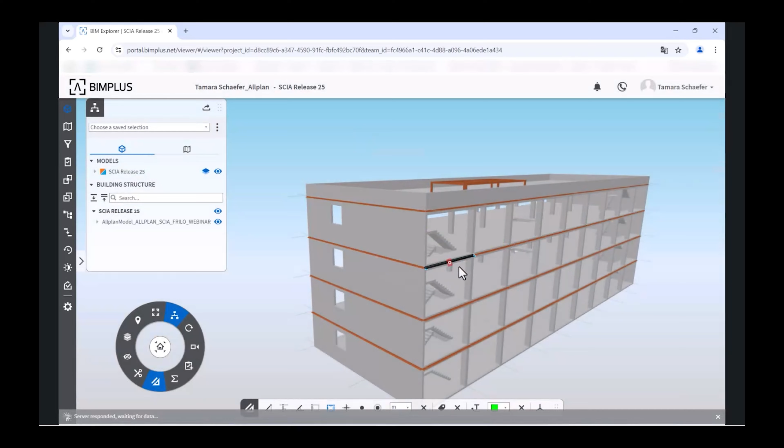So here we see the managed environment that I was describing earlier. The model can often exist in the Bimplus environment, providing the user with, as mentioned before, the many tool sets available within this collaborative project.

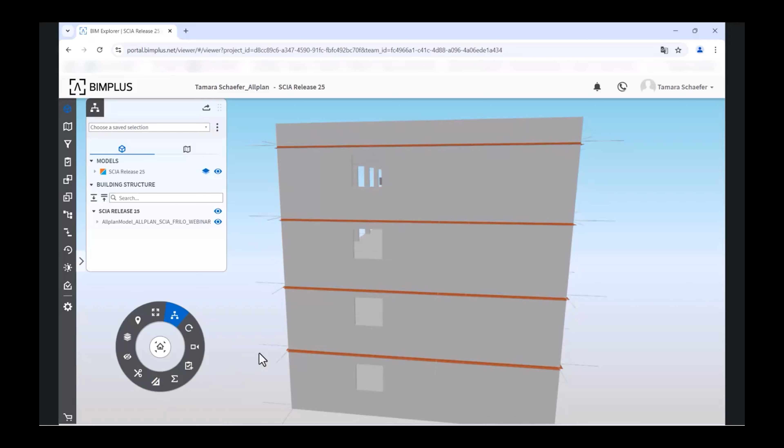It's important as well for the engineer to be able to assess early on the validity of the model, check the dimensions, and also interrogate the object properties within that model before anything is sent to autoconverter for further processing.

So of course in Bimplus it's also possible to edit properties, to update the attributes and perform a task commonly known as attribute management, but also to attach reports alongside the objects.

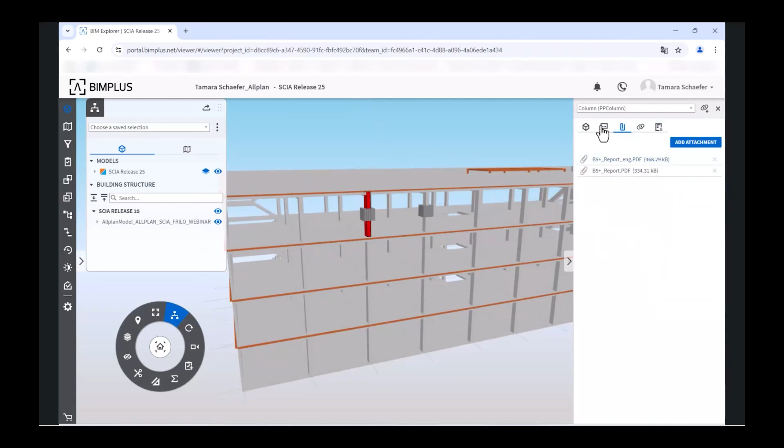So whether that is design data or drawing data, we can put any amount of attachments alongside the structural or the architectural information contained within that model.

And again, as stated, if there are issues that we need to flag up to anyone else in the team, we're able to do that and then set the required responsibility and the due date for those issues to be resolved.

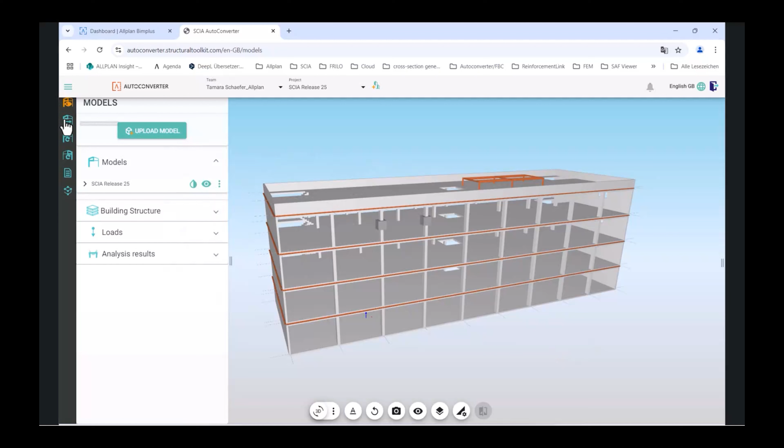So then when we move that model into the autoconverter environment, we have a number of steps that we need to follow in order to create a successful representation of the model for structural analysis.

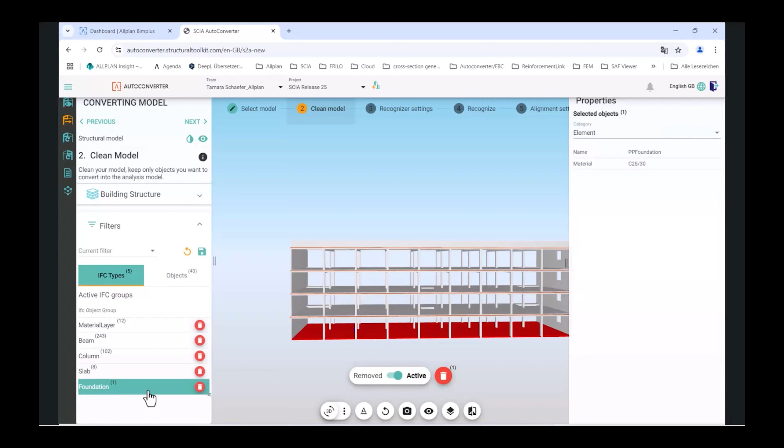So essentially in the first mode, we need to clean up the model. We need to take anything out of that model that doesn't really conform to a structural element, such as grid objects that may come along from axis definition when creating a model, and anything that we feel is not required for structural analysis. That may be a pure architectural item that's not defined as potentially a load-bearing object.

And then once we've done that, we can set up a bunch of filters that allow us to make that cleanup process easier in the future. And then once we've cleaned up that model, we're not deleting any objects. They just get removed from the process, and we can see that they still exist within that model.

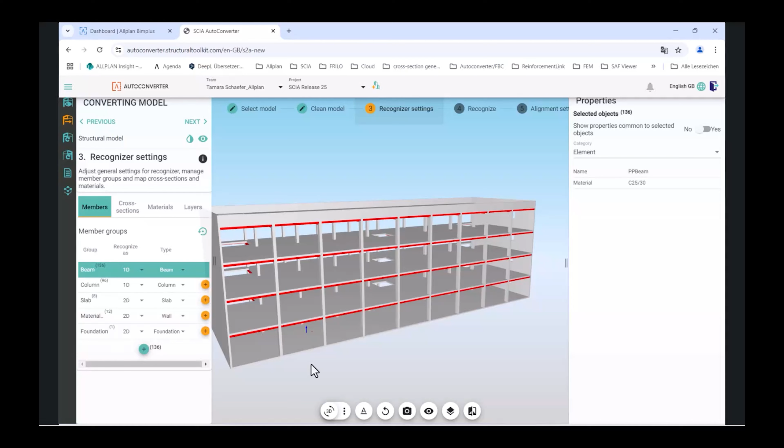So on the first pass of recognizing the objects, the autoconverter will now make an assumption and recognize the objects as either 1D or 2D elements and assign a type. So whether it assumes the objects to be beam or column, of course you're able to go in and change that.

But autoconverter now needs to establish what the section geometry is and what the materials are. So the first pass on actually creating that analytical model is to do something called the recognition phase.

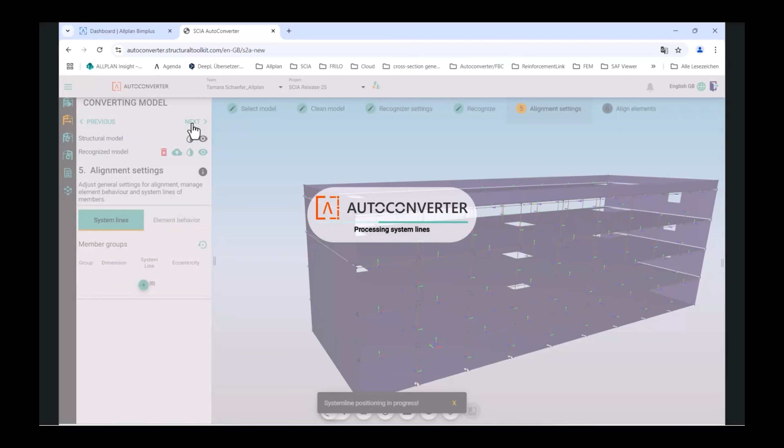So we recognize the model. There's nothing joined at the joints there, so it's not a complete structural representation, but at least now the cross-sectional geometry is recognized. The materials are now mapped across the databases, and it understands what type of model it is.

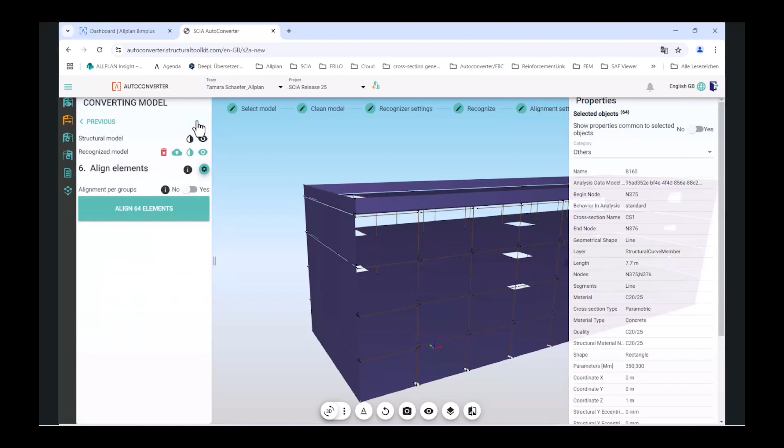Now the next job is to join this model together so that I get that continuity across the frame and across the surface elements, so that I can run this model successfully within the structural analysis tool. So we call that alignment.

And once we've done that and gone through the various options, we can see that we're presented back with a good model with continuity across all the interfaces, slabs and walls joined together, beams and columns joined together.

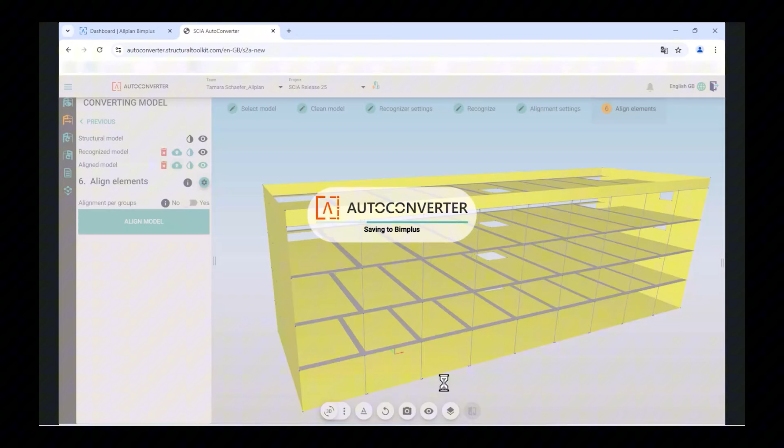So we're safe in the context that we can now send that model across into a structural analysis tool, in this case SCIA. But we can also export that representation of the analytical model back to our host environment Bimplus, so it becomes part of the project environment. So we can effectively now start to make the history of that model straight away.

So then, of course, we want to analyze this. So at this point, we now switch across to our structural analysis tool, in this case SCIA, which is SCIA and FRILO can be used at length with the integration with autoconverter.

But now what we're going to do is retrieve the model that we've saved back into Bimplus and bring that directly into the SCIA analysis tool. So we're creating that association between the two platforms.

So that means that whatever we do within SCIA, any changes that we make, we can represent those changes and go through those approval processes within Bimplus, so everyone can look and review.

Within this process, we see that AutoConverter is a really good step towards transferring models from Allplan or multiple other CAD applications to SCIA Engineer. It only takes a few steps to create the finished analysis model.

You save a lot of time when creating analysis models, and therefore more time for calculation. I think it's also important that we can build up a set of different models. If you need to do some testing, you can build a model in AutoConverter that's representative of a linear static model, and archive that back in the Bimplus environment for further usage. We can also create a different model for dynamic types of analysis, where we might put more offsets or different loading types, and build that into our revision process as well.

So that's it, a very short overview of AutoConverter and how it plays a part in the development of structural analysis files within SCIA Engineer. Thank you very much for your attention, and have a nice day.

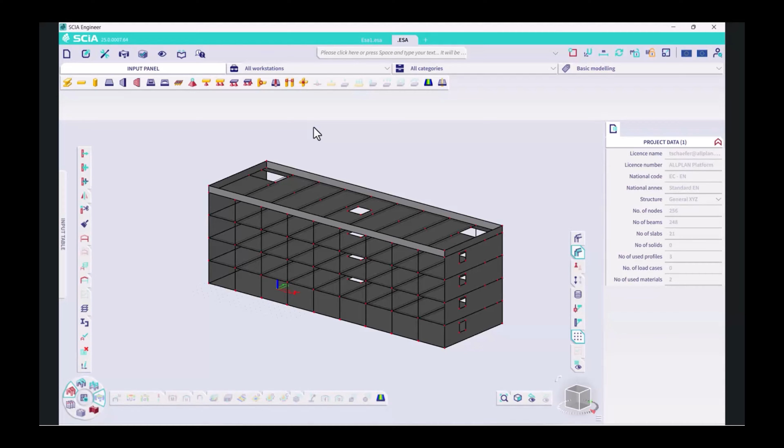The first question: can the loads be applied according to a specific modal shape in a harmonic analysis? Yeah, that's the one that I can answer. Indeed, you can first run a modal analysis to find out your modal shapes, and then afterwards you can assign a specific modal shape to your harmonic analysis.

Thanks a lot, Bjorn. Second question: there is a question about learning material on construction stages, design and checks. What is already available for our engineers? First of all, online we already have some documentation about construction stages, and that's available on our web help, at help.scia.net. There you can find a lot of information on the functionality, but also you can read about which checks and which materials are supported.

Besides that, there's also a webinar planned. It will be a topic on the application of construction stages on a multi-story building. So keep an eye on our website and newsletters for that. Thanks a lot, I'm looking forward to also look at that.